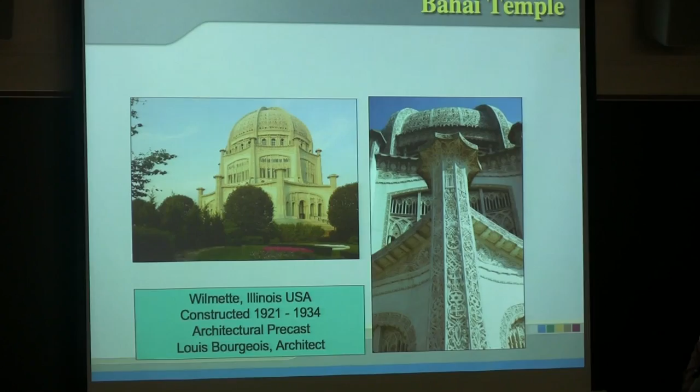This is called the Baha'i Temple, up in Wilmette, on the north shore of Chicago. It was started in the early 1920s, and finished the precast portion in 1934, although it wasn't completed until 1950. I don't know that any of you will work on a project that takes quite that long to complete. But this was when precast concrete was really in its infancy, and as an industry, we think of ourselves as being about 50 years old, so this was even before there was a precast industry.

But the precaster was actually out of New York. He created all of these forms first out of plaster, had somebody come in and sculpt all those plaster pieces, then they placed the concrete over that, mirroring the plaster pieces, creating this beautiful temple with a lot of architectural detail on it.

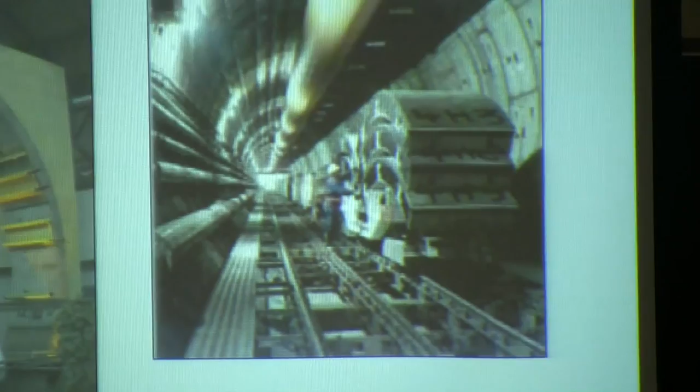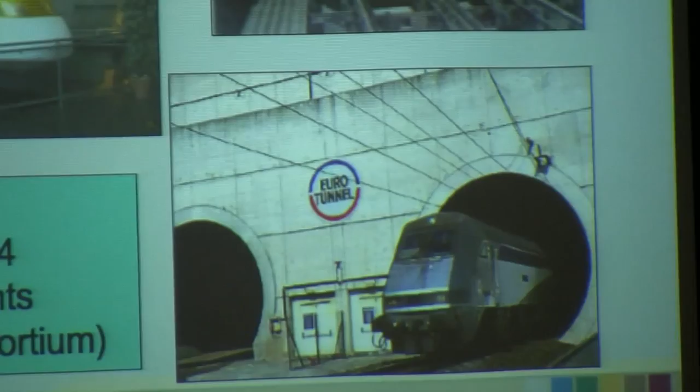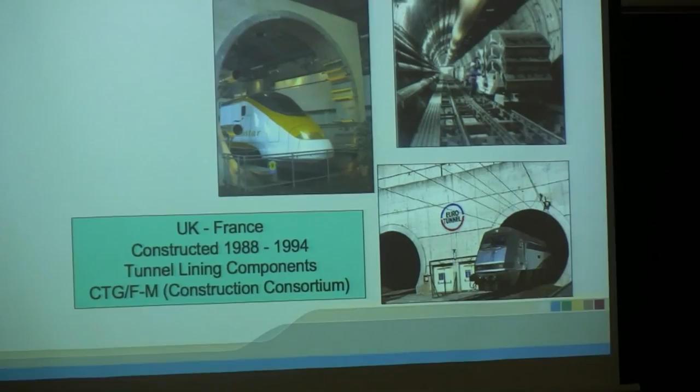Not quite as beautiful, but still quite a wonderful project, is the Channel Tunnel—the technology that allows us to go underneath the ocean and connect England to France. They actually used two different types of precast pieces: on the French side one type, and on the English side another. But they were both connected pieces, just tunnel lining components that were grouted and bolted into place, taking you through. This gives a really nice idea of all the different pieces that created the Channel.

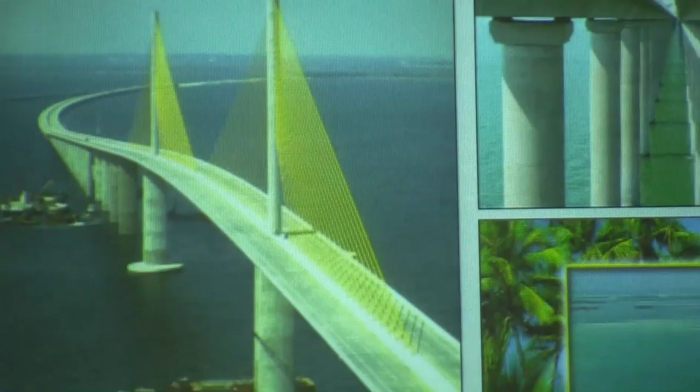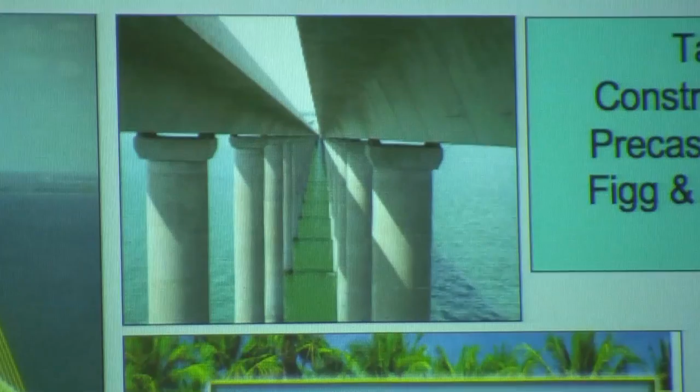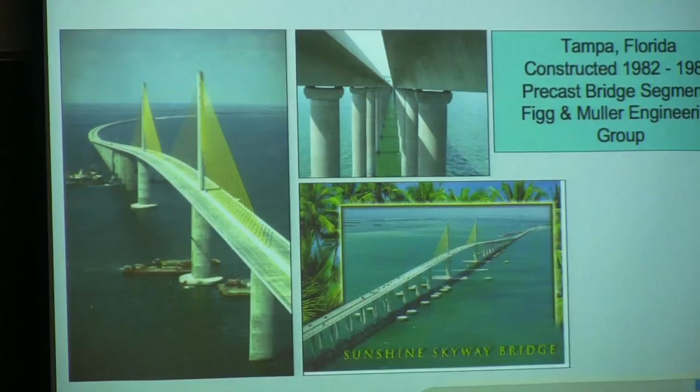The Sunshine Skyway Bridge is in Tampa, a 5.5 mile long bridge. It uses a cable stay main section, and then segmental pieces of precast that are connected together. It remains one of the longest segmental precast bridges out there. I love this project for two reasons: one is the technology that allowed them to do it—such a wonderful engineering feat—and the second is that it's a beautiful structure. There was a lot of beauty that went into it as well, and they were replacing an existing bridge.

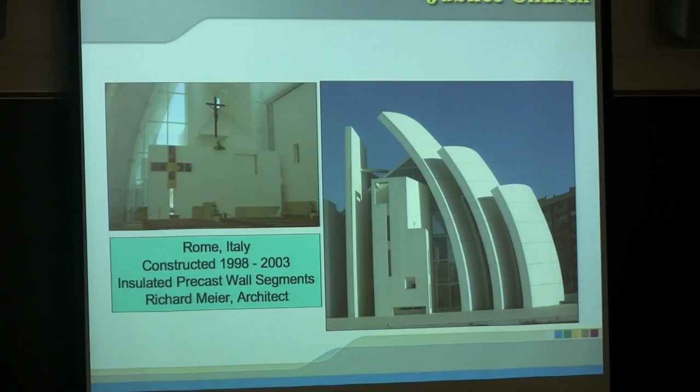This is a project in Rome called the Jubilee Church. I was actually showing this to some students on Monday night, and they said, oh, we just went to Rome last semester and visited this church. They said the pictures don't even begin to do it justice. But there are a couple things that are really remarkable about this project.

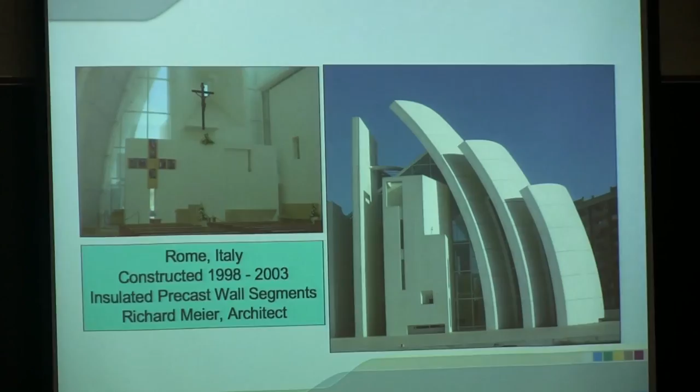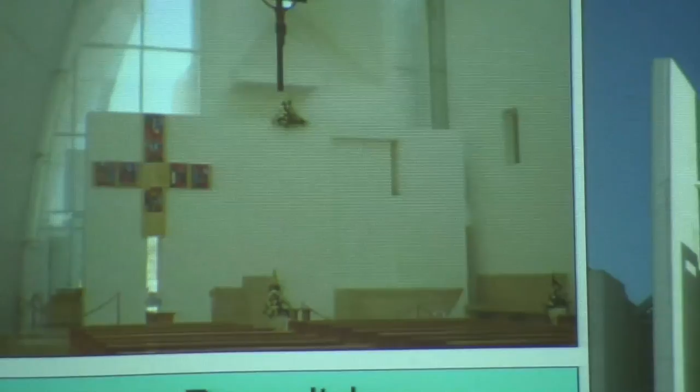One is the shape of the architectural precast. Most of the time when you think about concrete walls, you're thinking in terms of very straight lines, but with architectural precast you really start to have the ability to take on different shapes and looks for the structure. The other thing is that Richard Meier, the American architect who designed this, loves two things: he loves the bright white you can get, and he loves to design white buildings, feeling that they bring a lot to his designs. He also loves to bring light into his structures, and he managed to do that with a very reflective white material. They used white cement, and also an admixture that is a carbon dioxide inhibitor—so it's a self-cleaning concrete that actually takes carbon dioxide from the air, and is also a cleaner way of building.

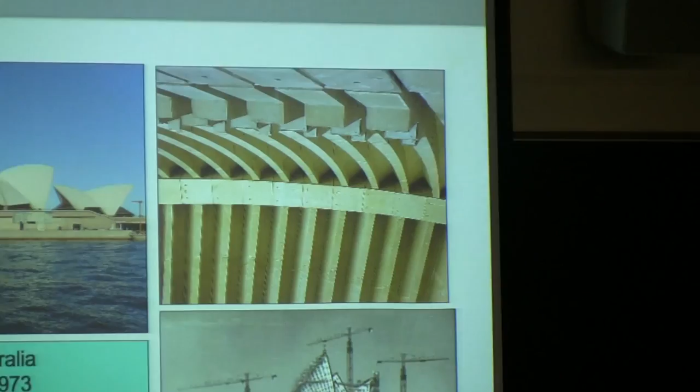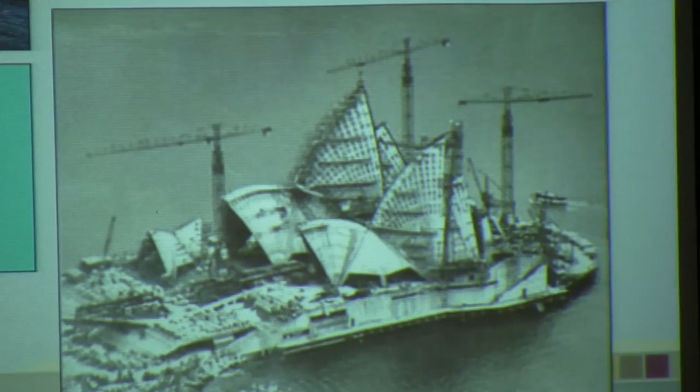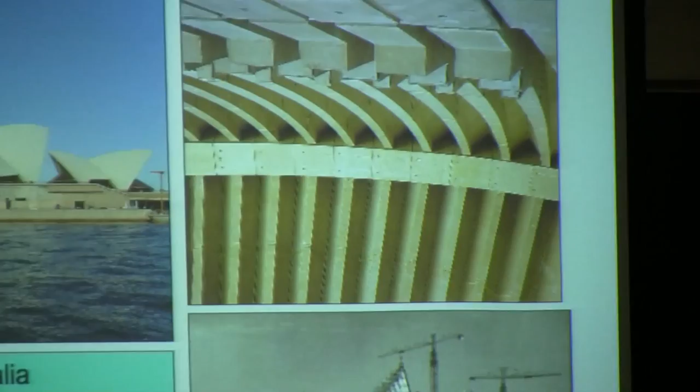Very similar in some ways, but a little earlier, is the Sydney Opera House. This was designed in the early 1960s by a Danish architect called Jørn Utzon. When he designed it, the technology was not available to actually build it, so it took them a long time to figure out how they were going to do it. What happened was he finally had this brainstorm that if he repeated the same radius for all the different stems of the seashell shape, he would be able to do it out of precast concrete.

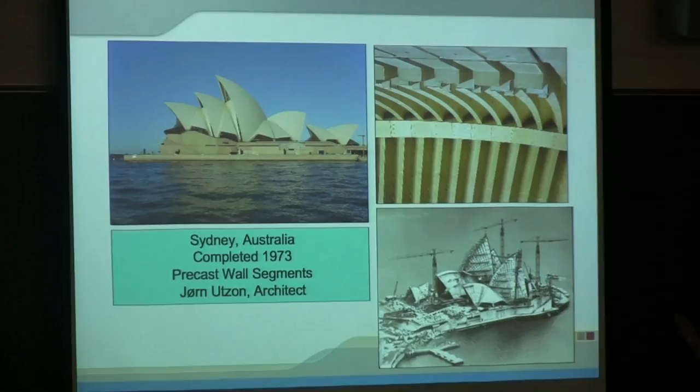It's actually one of the earliest examples of a building that used computer-aided design—very rudimentary, but one of the first projects. When you start to read about this project, you can't believe nobody's made a movie out of the making of the Sydney Opera House. There was so much intrigue, and the architect ended up getting fired before the project was finished—he never actually saw the finished project, and was so bitter about it. But it's still, to me, a remarkable engineering feat, and also just the beauty of the product.

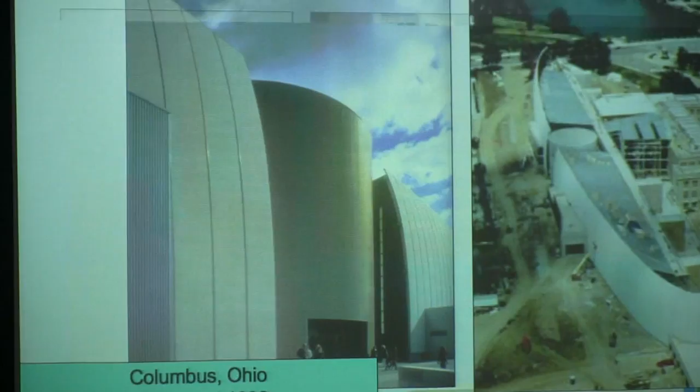This is actually a project that Mark's company worked on, called COSI, the Center of Science and Industry in Columbus, Ohio. Do you know anything about this? You want to?

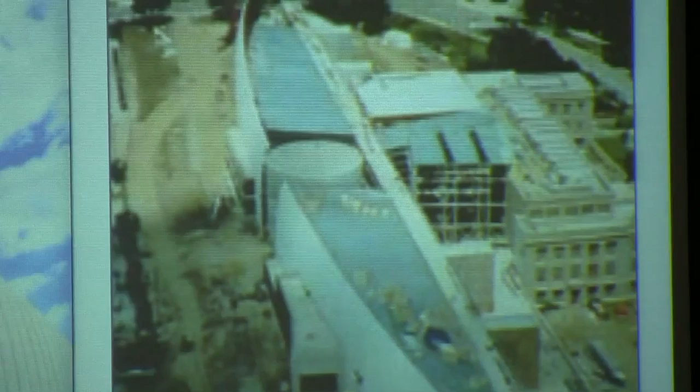Yeah, thank you, Marty.

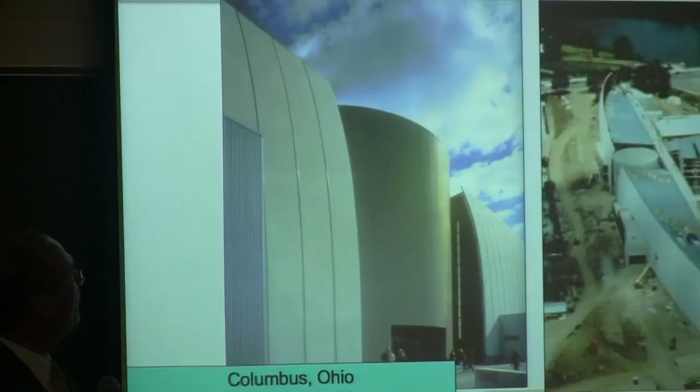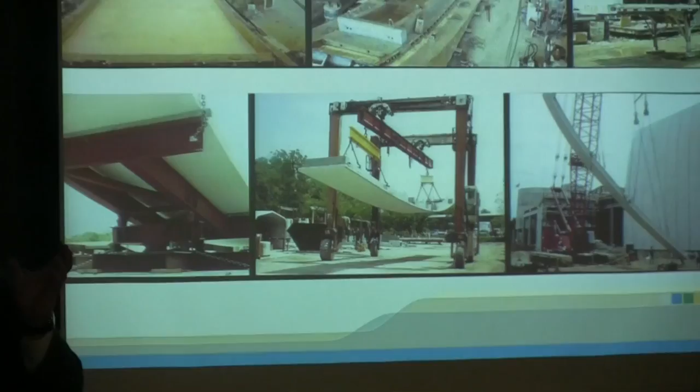This particular project had some big challenges. The Japanese architect, Arata Isozaki, wanted very tall panels that swept back toward the top of the structure, which made them very difficult to form and transport. So we had to build special forms, and since the panels didn't lay flat, we had to brace them on the back of trucks because of that sweeping arch near the roof.

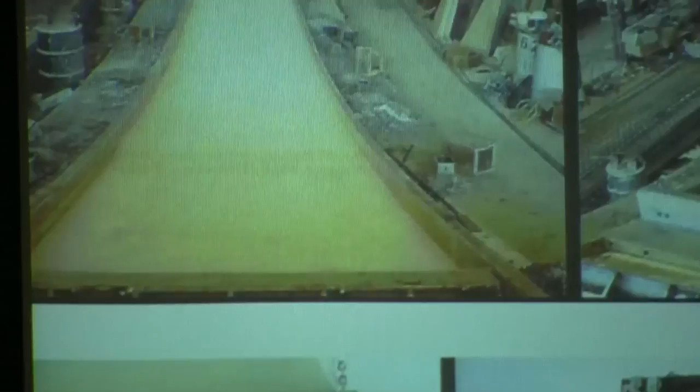These are some of the forms we were dealing with, as you can see, and this is the bracing of the panels when they were shipped to the job site.

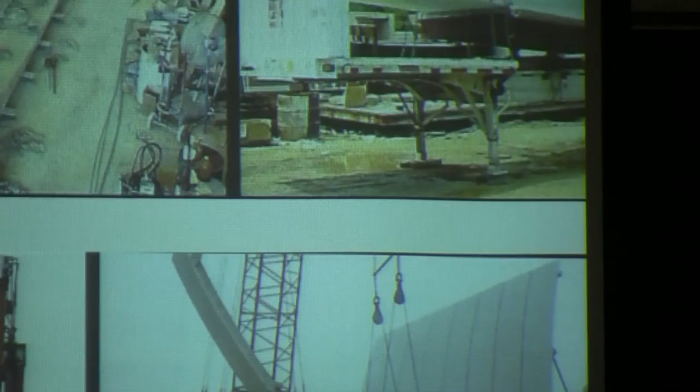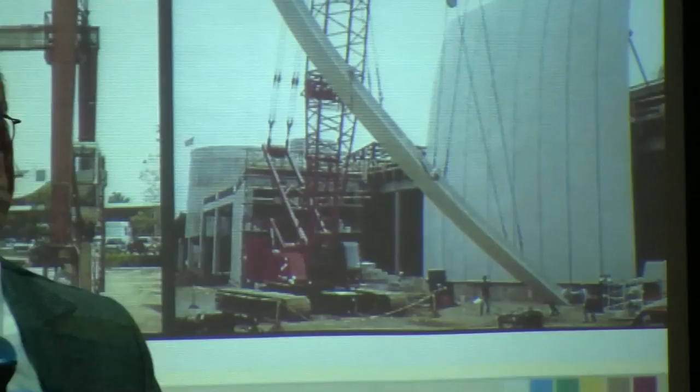From the standpoint of the joints, another unusual feature of this job is that typically precast panel joints are flat and caulked with a piece of foam backer rod. The architect was very concerned about those joints and what they would look like, so they came up with a stainless steel feature. It's hard to see in this picture, but it's a rounded bullnose shape, a stainless steel feature that was put into the panels between the joints to give it a different look.

On the ends of the building, go back to the last slide, Marty. We had a very difficult condition here, kind of like a clothoid type curve. You had it sweeping upward back toward the roof and actually radiusing and curving around on the ends of the panels as well. So again, a very, very challenging architectural precast project.

So that's my seventh wonder of my seven wonders of precast. I think it's fun when you're thinking about a product, figuring out how to take it to the limits. What can you do with it that's a little bit different? But most of the projects you work on, if you're working with precast concrete, you're not going to work on that.

I always think of design and construction as being kind of like making music. I'm a musician by avocation, that's my other interest. I think designers and contractors do a lot of things similar to what musicians do. You're working within this construct, within the framework of either the white keys and black keys and how you put those together, or within what pieces of precast you put together and how they end up looking. As you saw from the projects we just looked at, it can look very different, they can function very differently, but they're all pretty similar products. I like to think that with those products, you're either doing something like Handel or you're doing Metallica, but you're still working within that same idea.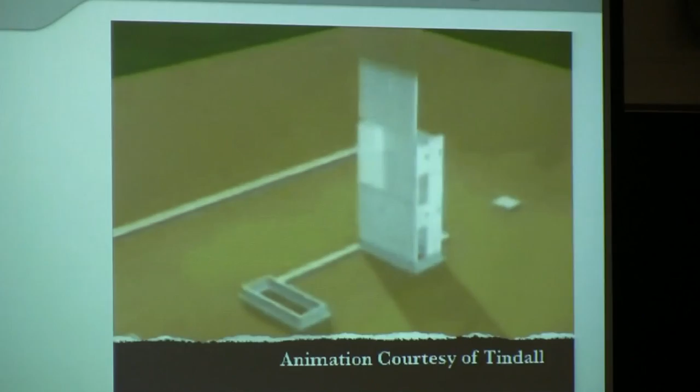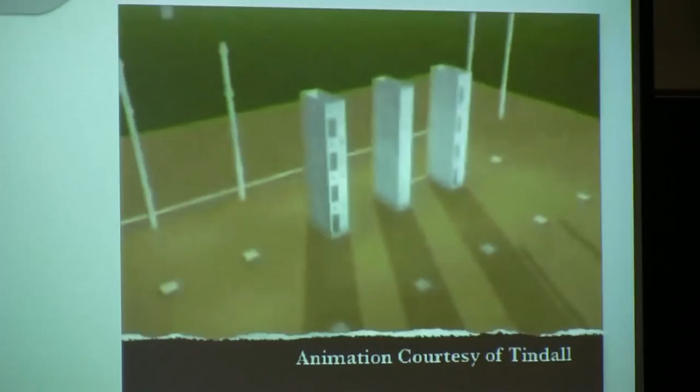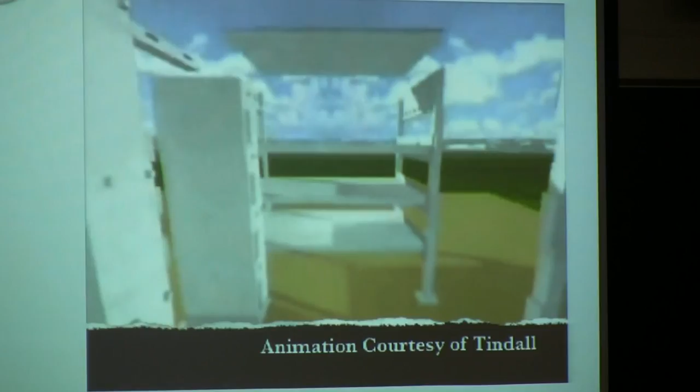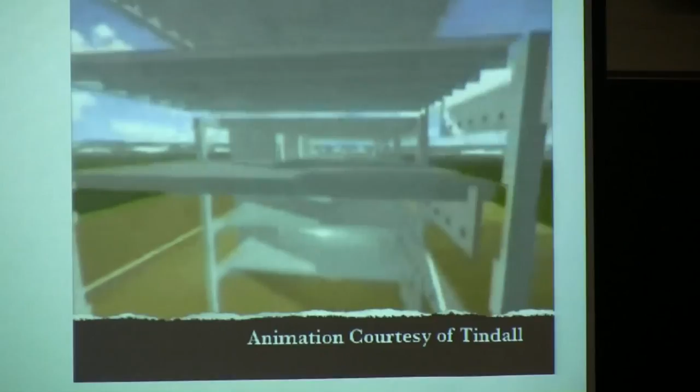So what are the different products? This is a little animation showing all the different precast products you can use in a precast structure and frame building. You start with interior wall panels, columns, and beams, and you can even use precast stairs. In this building, they have spandrel panels that also function as part of the structure, because the double T's rest on there. You've got the spandrel panel, and they've got corbels coming off of it, and the stems of the double T's rest on those corbels. There are different ways of doing that. Sometimes you can do the same idea with hollow core floors, where you might create a shelf to put that together. This just shows you how all the different pieces of precast fit together, and then you can have an entire precast structure or frame.

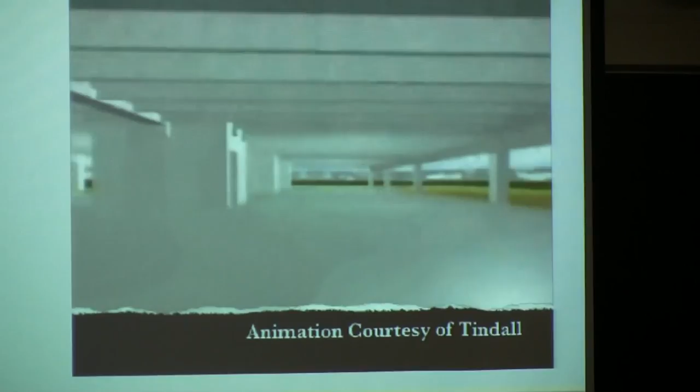Our industry would love it if every building used this kind of structural system, but more often than not, we're working within the best practices for that building. So you're maybe putting architectural precast on a steel structure or a cast-in-place structure. Sometimes it's on a precast structure like this, but this at least gives you an idea of some of the different products that come together.

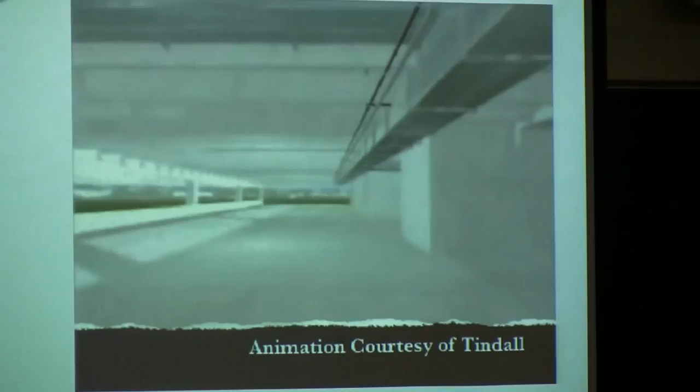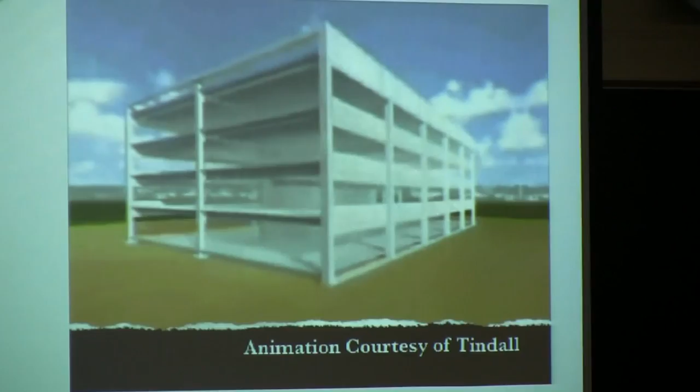And there you've got your HVAC, hanging off the bottom of the double T's. And then you come out and put the windows in. So in three minutes you can put up a building. That's one of the great things about precast.

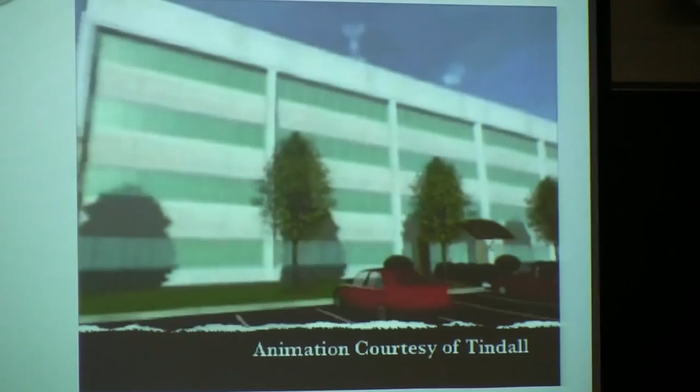It is something that you can build with pretty quickly, and you don't have to have a lot of things like winterization of the site. You don't have to do weatherproofing. You don't have to have a lot of materials on the site. The precast comes to the job site, gets taken off the truck, gets put right on the building. The truck drives away, and that's what you have. You don't have to have a lot of scaffolding. What you really need is just that crane out on the job site.

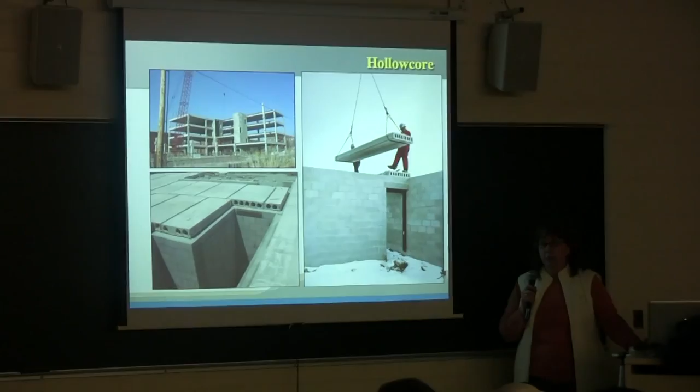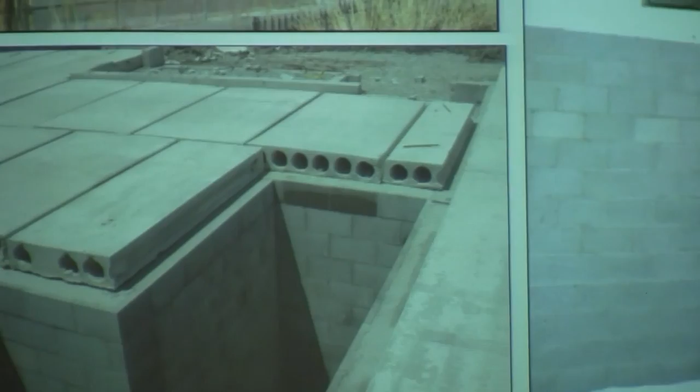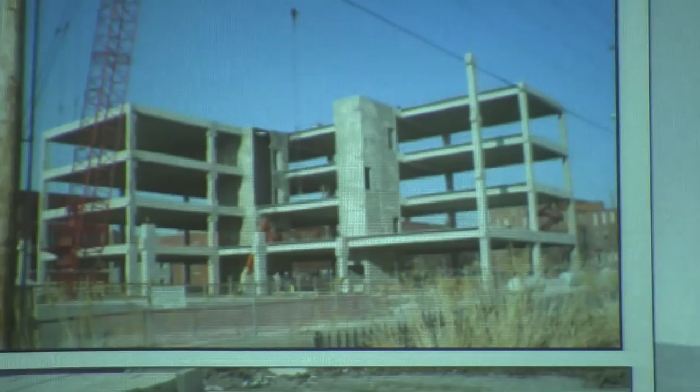So I thought I would take you through what the different products are that we offer as an industry. Probably the most common product that you're going to see is hollow core. Hollow core comes in widths of 2 feet, 4 feet, and 8 feet. Typically spans about 30 feet, although you can span up to 50 feet with it. And you can also get floors that are anywhere from 6 inches deep to 16 inches deep, but typically they're about 12 inches deep and they span about 30 feet.

So you can see they've got those holes in there. They've got the hollow cores, which is why it's called hollow core. Anybody want to take a guess as to why you put those cores in the middle of the panels?

You're too juiced up on pizza to think?

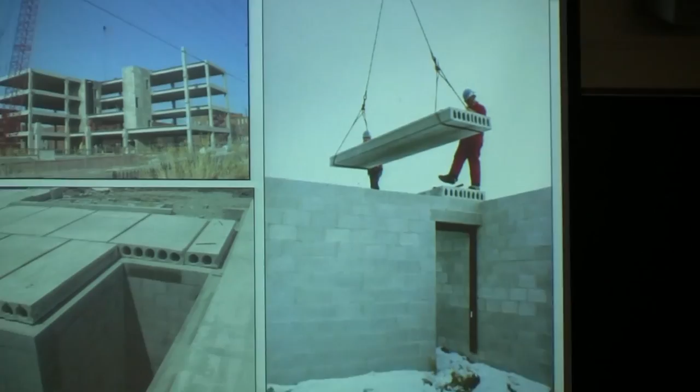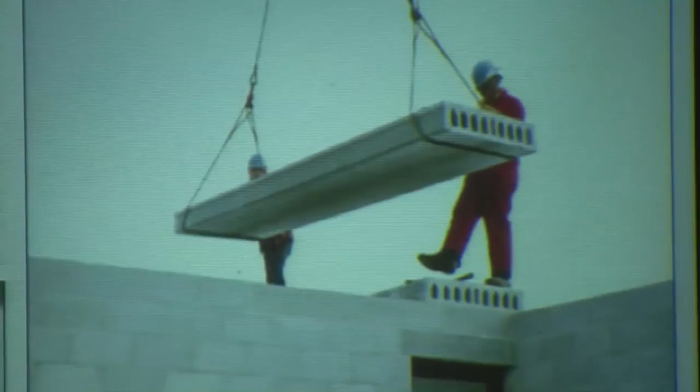It's the weight. You don't need the weight of the concrete for the strength. So the precaster will take out that weight, makes it easier to ship them, and they still function very well.

Double T's. All right, here's an easy question. Who can tell me why they're called double T's?

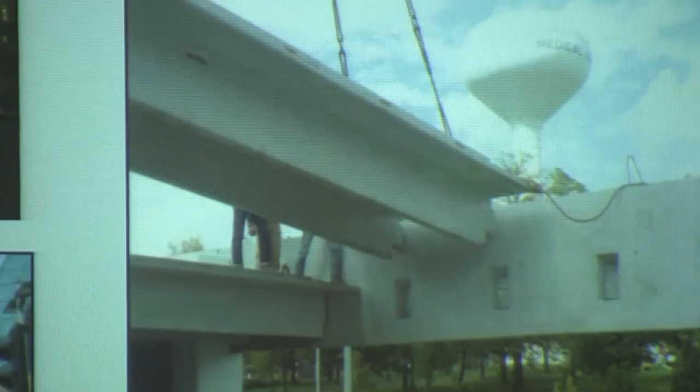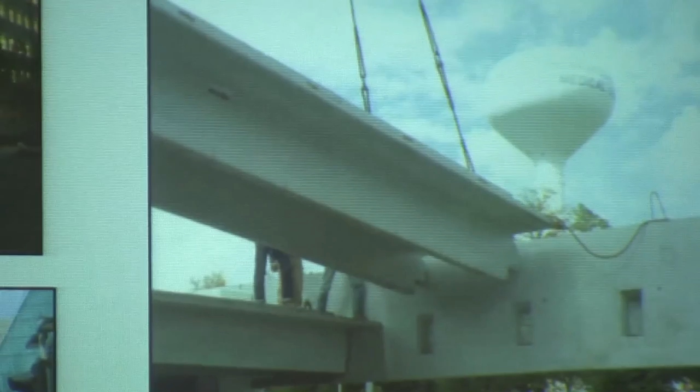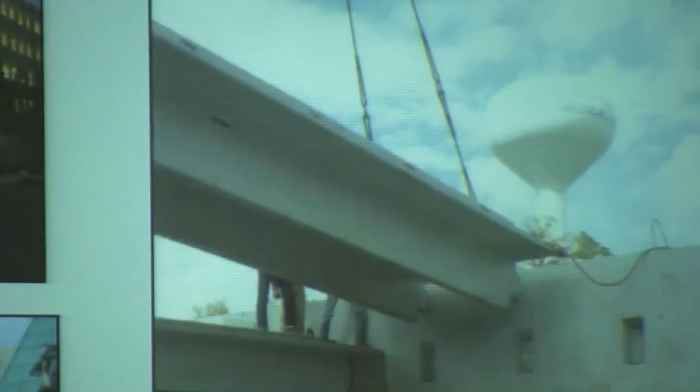That's it. Ah, all right, you guys are still awake. Yes, it looks like 2 T's next to each other. So you've got your flange across the top, and then you've got your stems coming down, and it looks like 2 T's next to each other. Those are typically going to be 12 feet wide, and they can span about 60 feet long, but you can span anywhere up to about 110 feet with them.

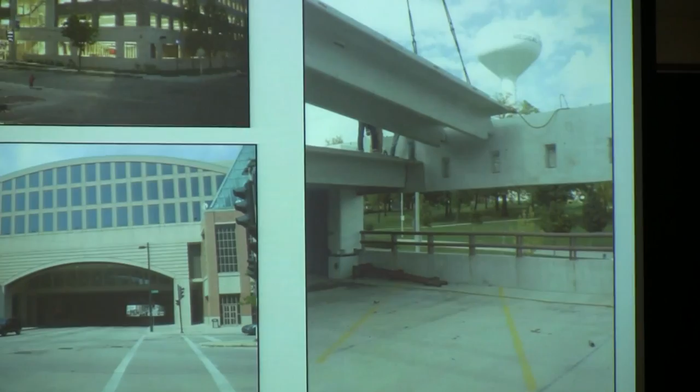What you do when you start getting longer pieces is you usually have a system where you put the wheels on the front, and then you almost use the double T as the truck bed, and then you put wheels on the back of it, so you don't actually put it on a truck bed. You just transport it with the 2 wheels.

Just a quick comment, some things have been innovated in the industry. High Concrete in particular helped innovate a 15-foot wide double T flange, and they're also working on a 16-footer. You're probably wondering, how would you ship a piece like that? It would overhang the truck, and they've actually come up with a kind of tilt brace, if you will, that tilts the T over diagonally, which allows it to go down the road. So that's one of the bigger innovations in the industry. What that allows you to do is have wider bay spacings and eliminate more columns, and helps make for a much more efficient design in some cases.

Architectural precast, this is mostly what High does in this part of the country. And that's really all of the exterior cladding on a building, where you're starting to look at what does it look like, the color, the texture. Most of the precast that we talk about is cast in what our industry likes to call long line beds. There's steel beds, and you'll cast products on there thousands of times. You'll make the same product over and over again. But with architectural precast, each piece is unique. It's usually cast in a very high quality wood form, and it's specifically designed and cast for a particular project.

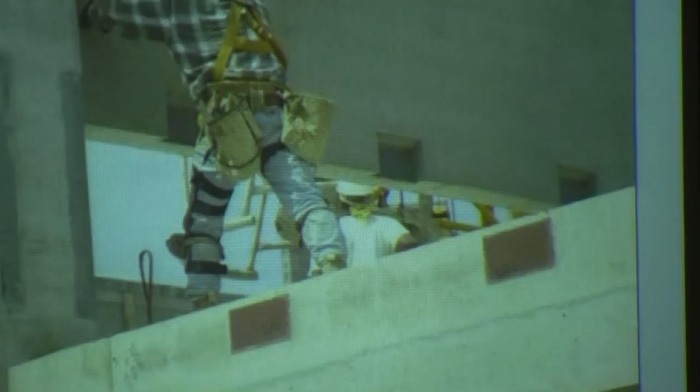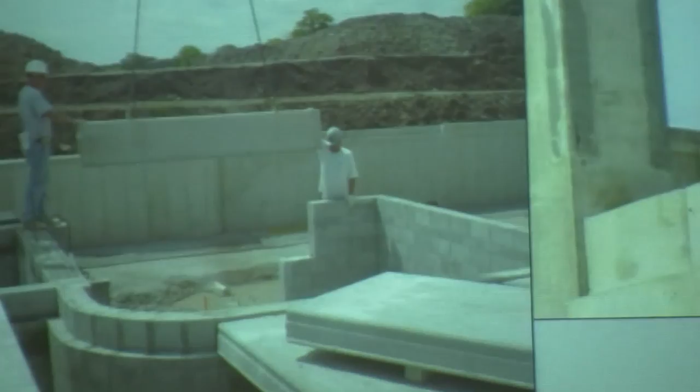Structural products, then we also have products that are inverted T's, ledger beams, columns, anything that is going to support the decks and the structure of a building.

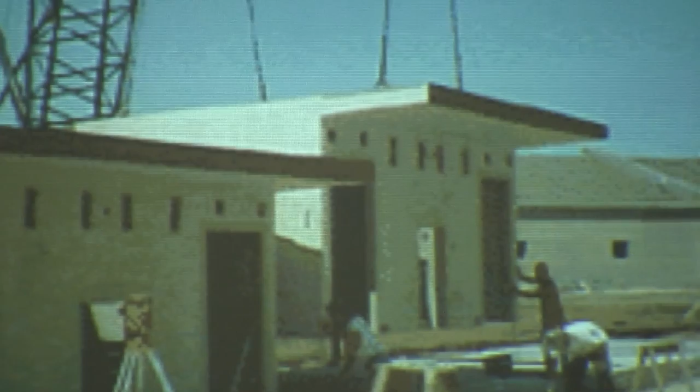Back 10 years ago when I started this job, we were doing a lot of modular construction because there was a prison market. Right now nobody's building prisons in Illinois and Wisconsin, but the technology is there to do a 5-sided box with an empty section on the bottom, then stack the boxes one on top of the other, and the ceiling of the box on the bottom acts as the floor for the box on top. The nice thing about these is you've got the ability to add your toilets, your beds, your safety equipment, all at the manufacturing plant instead of doing that in the field. A lot of insurance companies right now are really pushing that idea of modular construction. They like to get as much of the construction happening in the controlled environment of a plant and keep it out of the field because it's so much safer.

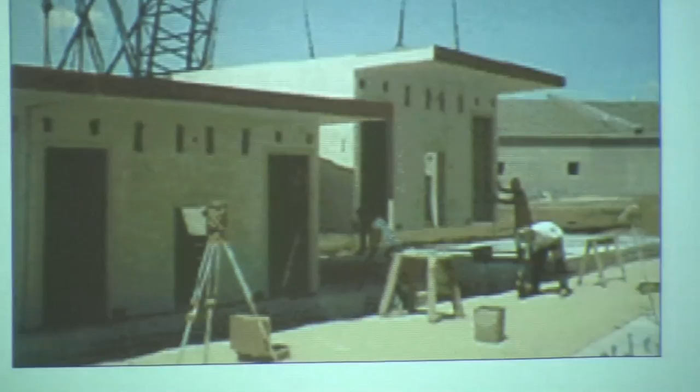You guys are probably doing electrical and things like that in some of your panels, you want to talk about that? Yeah, that's one of the nice things about precast panels, and we're seeing more of that with the type of work we do nowadays. The architectural panels can be anything from pure cladding panels to ones that actually carry loads, building loads, floor loads, roof loads. We can actually, as Marty mentioned, cast electrical boxes and conduits in the back of panels. That's very helpful for some industries, like prisons in some cases, or some manufacturing buildings. So again, a very versatile product from that standpoint.

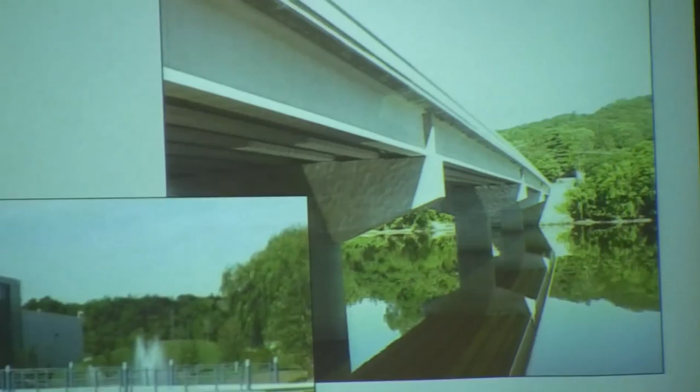Then the last product I wanted to share with you are our transportation products. We've got arch culverts, box beams, sound walls, I-beams, AASHTO beams. So there are all sorts of different bridge products out there. In Illinois, the tollway uses precast for about 95% of their bridges, and the DOT uses precast for about 50% of their bridges.

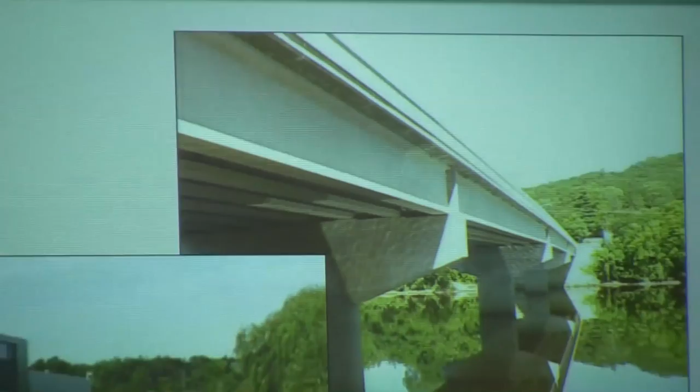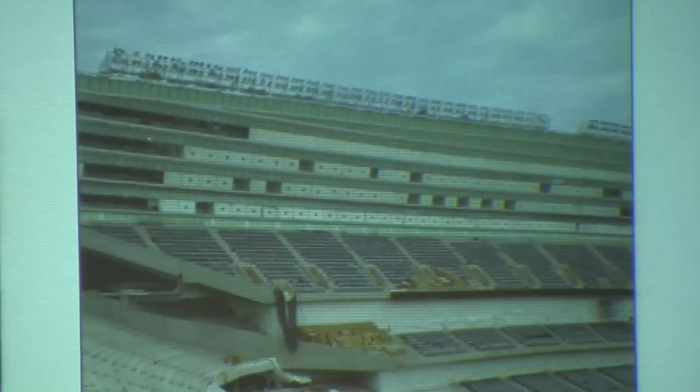I thought I'd also take you through the typical places where you'll see our products used. One is athletic facilities. I didn't go through the riser beams and raker beams you'll see, but we see a lot of athletic facilities, like Busch Stadium.

This is a picture of Soldier Field in Chicago, Comiskey Park. So whether it be a large professional stadium or Milwaukee School of Engineering's recreational facility, we're seeing a lot of recreational facilities using precast concrete. The athletic structures can use both structural and architectural precast.

The Indianapolis Colts just built a new stadium, the Lucas Oil Stadium, which some of you may have seen on TV. The exterior of that building looks like a masonry structure, but it's actually an insulated brick-clad precast panel system.

The architects wanted something that would erect very quickly and have some energy conserving properties, so they wanted an insulation board sandwiched between the concrete layers for efficiency. Again, it would erect quickly and be very durable.

Athletic or educational facilities - a lot of K through 12 schools are starting to use precast, especially if they have to meet tight construction deadlines and need to build through the winter. As I mentioned earlier, there's not a lot of winterization needed with precast, so that can be quite helpful. You don't have to get those big sheets of plastic up over the whole thing.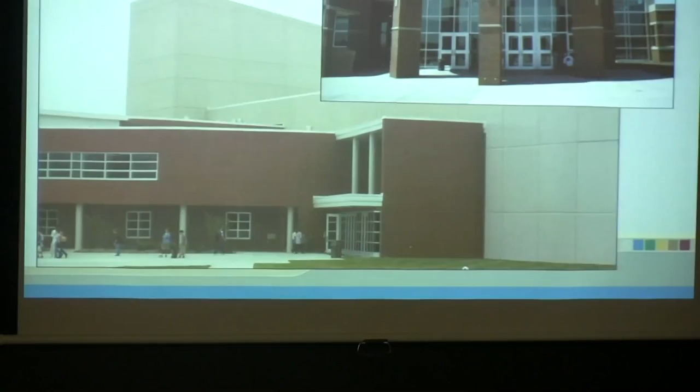You can pretty much put precast up all winter long. The things that will stop you are if it's too icy for the crane to operate, really high winds, and lightning. Other than that, you can put precast up 12 months a year. That's one reason educational facilities really like it.

They also like the insulation Mark was talking about. You can put insulation in the wall panels, so you really have almost a thermal cooler heating and cooling the whole structure. A lot of school facilities like that idea because they can downsize their HVAC system, making it more cost efficient to operate the school in the long term.

We also see a lot of healthcare facilities - hospitals, nursing homes, anywhere fire is an issue or where you want a very clean room. Especially with architectural precast, we're seeing a lot of hospital construction. I looked at one of his projects today at an architecture firm I was at.

Industrial facilities - anybody who travels up to Chicago probably sees warehouse after warehouse after warehouse. In the Chicago area, we've really perfected the art of the precast concrete warehouse. You can have very clean facilities, and if you need daylighting, you can have daylighting. These are usually driven more by price than by design, whereas the kind of work Mark's company does is driven more by design. These are usually pretty simple boxes where cost is the key factor.

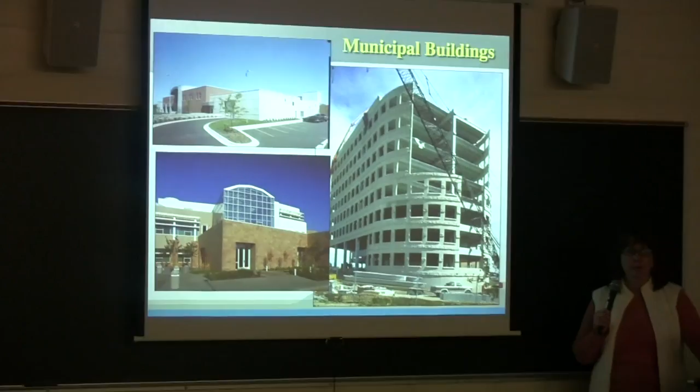A lot of municipal buildings too. I laugh - people keep asking me what our members are building these days, and everybody's building water treatment facilities. That's the big hot market right now, other than healthcare. But also courthouses, libraries, any kind of municipal building - we're seeing a lot of those as well.

A lot of architectural precast goes on offices, but again, you can use that entire precast structure and frame. This is actually the FBI building in Chicago. Do you know much about that building? That's one of his projects, but it's in Chicago.

That brings to mind one of the other things our institute has been doing a lot of research on, which is blast-resistant design. We're working with the U.S. Air Force right now to create panels and connection details that are very resistant to blast. Sometime in 2010, we should see a study come out that shows how to improve blast resistance.

And here's your residential, but most of it is going to be multifamily. Hollow core is the big thing in multifamily, but we also see a lot of units like these, which even have precast demising walls between the units and the floors, so the whole thing is done out of precast.

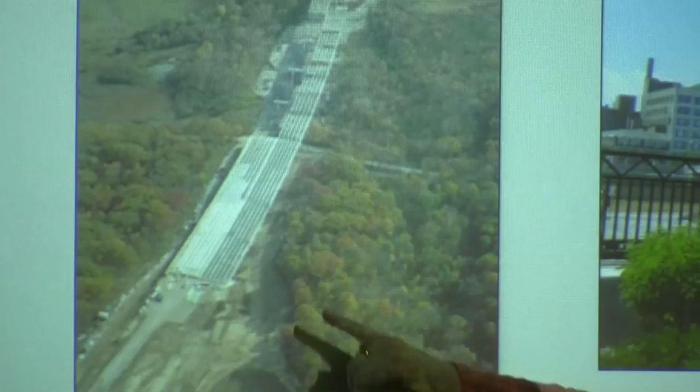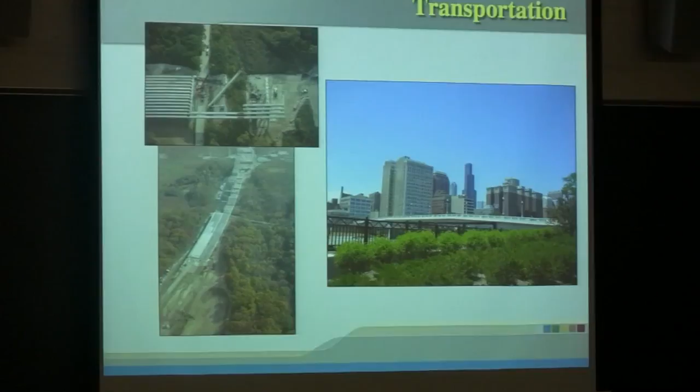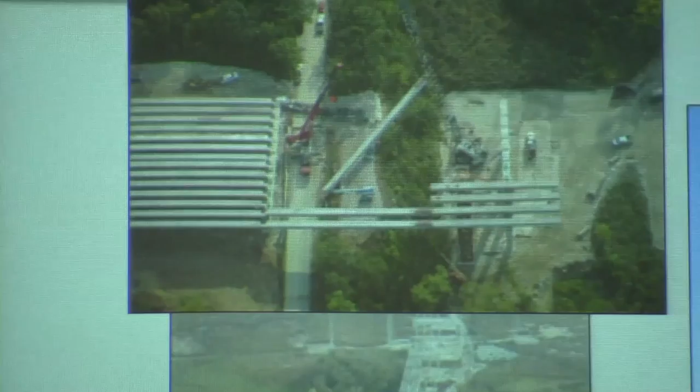Then transportation, again a lot of bridges being done. Here's the Des Plaines River Bridge on I-355, where we had 170-foot long spans. They were done in a plant near Dwight, Illinois, and went right up 55. Pretty intensely large beams, I think they're 86 inches tall and 175 feet long.

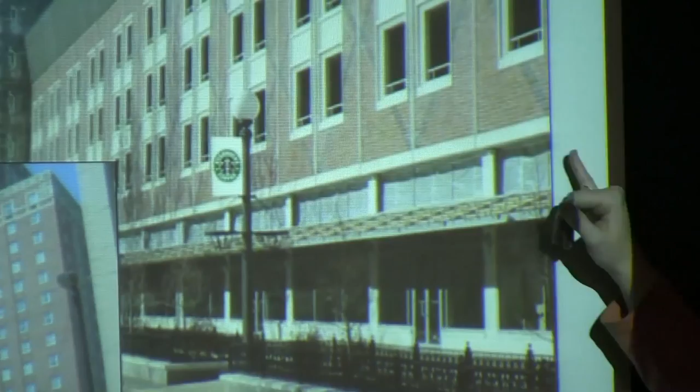And then parking decks. Parking decks are kind of your standard product that you're going to see done in precast concrete. You've got your double T beams, your spandrel panels, and what we're starting to see more and more is mixed use facilities, and also facilities incorporating thin brick, really starting to make them far more attractive than they were.

Back in the 80s and 70s, parking became kind of an afterthought, where it was this gray box that sat next to whatever the real project was. But that's not originally how parking decks were thought of, and now we're coming back around and seeing parking included as part of the project and part of the community, really taking on the look of the community.

I think that picture on the right, Marty, is that the University of Illinois? Yeah, if any of you've seen that, that's actually a job that we did at our Paxton, Illinois facility.

I'd just like to reiterate what Marty said. From my perspective, as a sales and marketing type, we're seeing a lot more interest from contractors and architects looking at parking. Parking garages used to be just a place to shove cars in, kind of structural, kind of ugly things next to the building. But a lot of these designers and architects are now putting these garages next to their buildings, or in very prominent locations, so they want them to be more architecturally like the buildings they're next to. They're being more demanding with exterior finishes, maybe multiple colors and textures, maybe thin brick cladding like you see in the garage here. There's a lot more interest in creating those designs.

Yes. Oh, they did, okay, so you got to see those. Yeah, that's interesting.

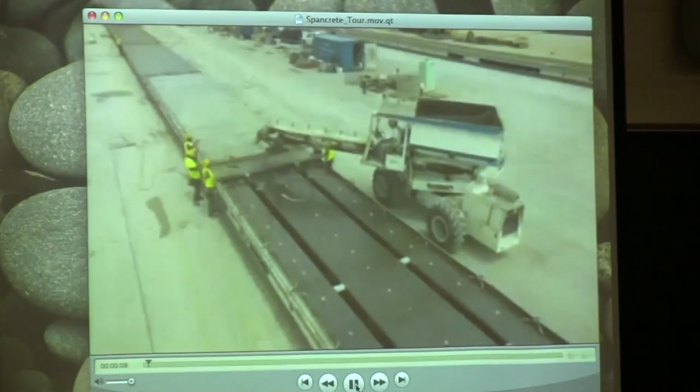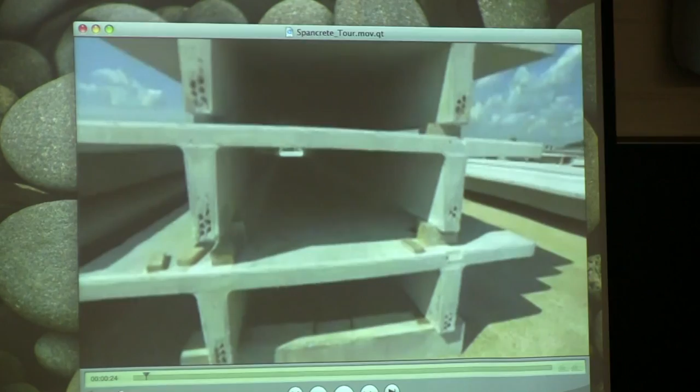Yeah. I think it's only getting sound from my computer. Now I've lost it. See, it's on my computer, it's not on that computer. All right, well, we can talk a little bit about it.

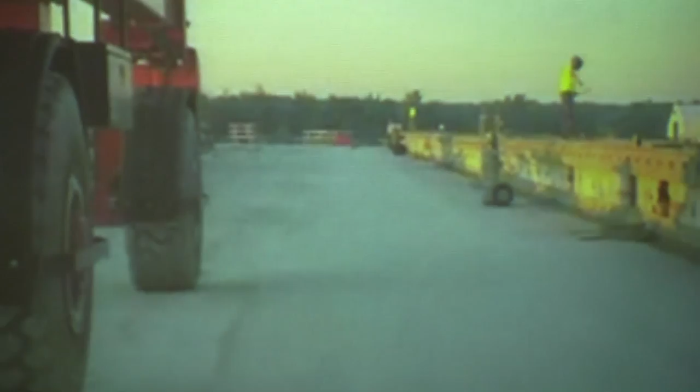This shows you at least what a precast plant looks like. These are all double T's being done, just to give you an idea of what a precast plant looks like. This is a double T plant, but there are other types of plants available that do architectural and things like that. This is showing outdoor casting with architectural work. Typically we're pouring everything inside, so it's a little bit different.

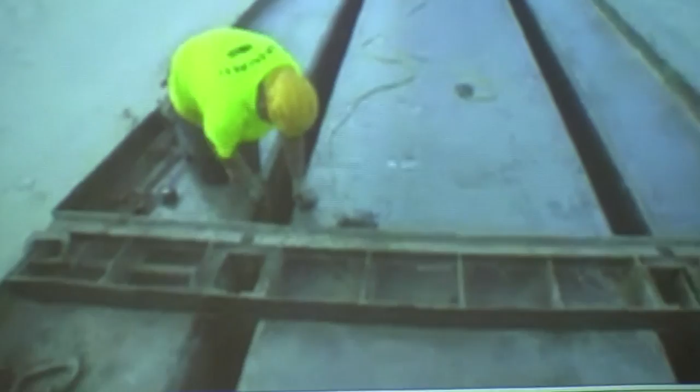Well, without the sound, I'm not going to spend too much time on that. It's all double T's, like a virtual tour of that.

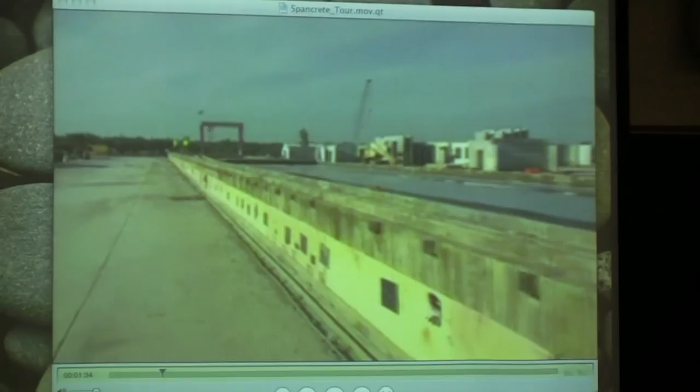Okay, so long beds that Marty was talking about. You run these long double T pieces, run your pre-stressing cables and so forth that I think Dr. Wabbing had shown you, or you had seen at County Materials. They'll run the cables down the legs of the double T pieces, as you can see in the forms, then pour the material in, finish the top flange and put the mesh in the top. They're able to create different piece lengths from those forms, which they use over and over again—strip those panels out, clean them up, and reuse them.

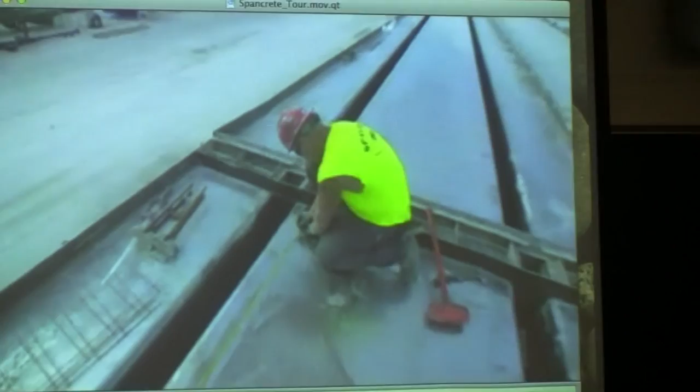What happens with the double T's in any kind of pre-stressed product is they start with wire pieces or steel pieces called 7-wire strands. They've got one piece of strand going through the middle and then 6 pieces of strand wrapped around that. Concrete is great in compression, but it's weak in tension, and that's why you add this.

You add your tension with your pre-stressing strands. You start with a form like this. You put your strand in there, and then you're going to stretch it at strengths of 40 or 50,000 psi. Then you're going to place your concrete in there, and this is going to stretch like a steel rubber band.

You place your concrete in the form. The concrete is going to cure around the strand that's being stressed. The next morning, they'll have the concrete all cured, usually a minimum strength of 3,500 psi overnight. Then they come in, break their cylinders, make sure everything's working the way it should, and then they'll cut both ends of the strand.

The strand is functioning like a steel rubber band, but it's been captured by that concrete. So when they cut the two ends of it, it wants to snap back together. And so now you have a piece of concrete that's good in tension as well as being good in compression.